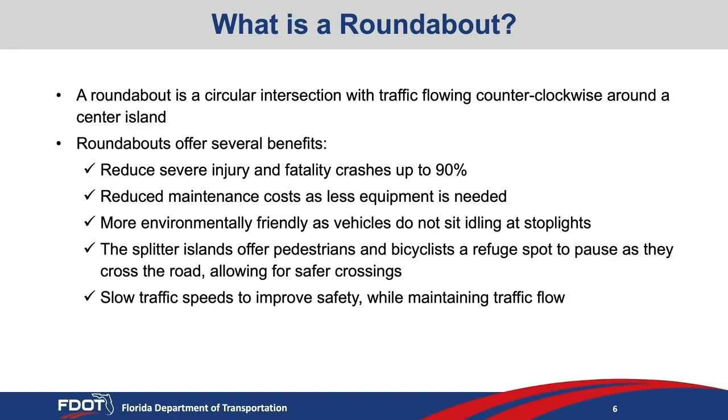A roundabout is a circular intersection with traffic flowing counterclockwise around a center island. Roundabouts offer several benefits, such as reducing severe injury and fatality crashes up to 90%, reducing maintenance costs as less equipment is needed, and are more environmentally friendly as vehicles do not sit idling at stoplights. Splitter islands offer pedestrians and bicyclists a refuge spot to pause as they cross the road, allowing for safer crossings, and slow traffic speed to improve safety while maintaining traffic flow.

The purpose of this project is to replace the existing signalized intersection on US 41 at Gulfstream Avenue with a multi-lane roundabout to improve non-motorized connectivity and access, as well as vehicular traffic flow and operations between the City of Sarasota's downtown Central Business District, the Bayfront area, and Barrier Islands.

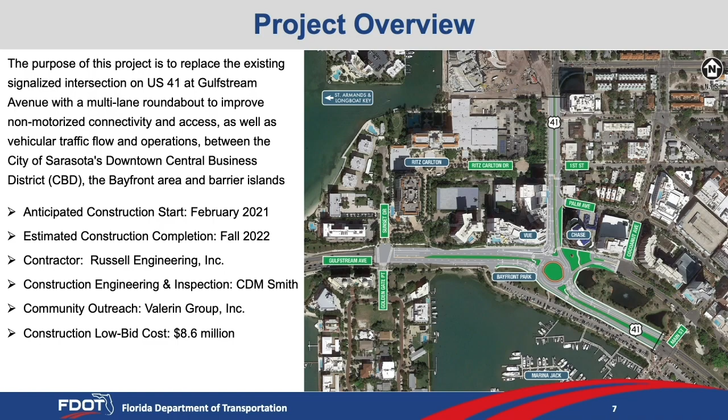The project is scheduled to begin in February 2021 and is anticipated to be completed in late fall 2022. The contractor performing the work will be Russell Engineering. Construction, engineering, and inspection services will be performed by CDM Smith, and community outreach will be led by the Valerin Group. The estimated cost of the project is $8.6 million.

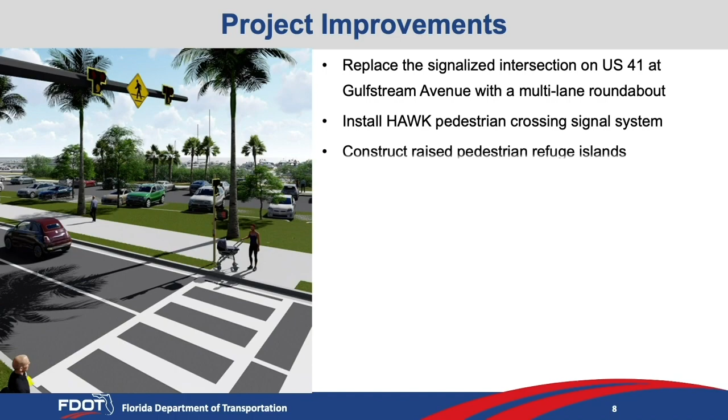In addition to replacing the signalized intersection on US 41 at Gulfstream Avenue with a multi-lane roundabout, this project will include installing a HAWK pedestrian crossing signal system, constructing raised pedestrian refuge islands, replacing underground drainage facilities, utilities, fiber optic communications, irrigation, landscaping, LED street lights, and reconfiguring stormwater retention ponds. New sidewalks and pedestrian walkways will also be constructed.

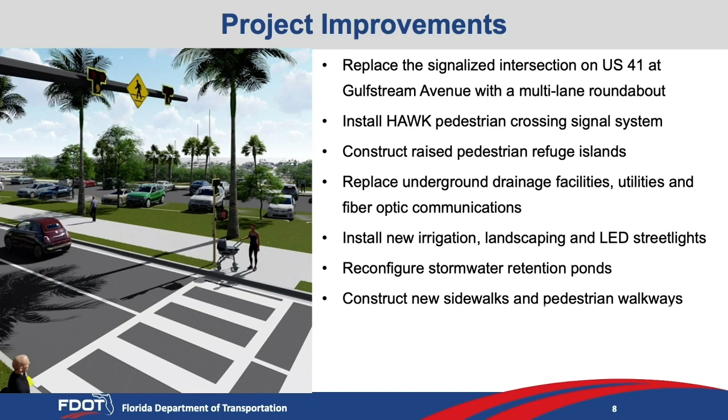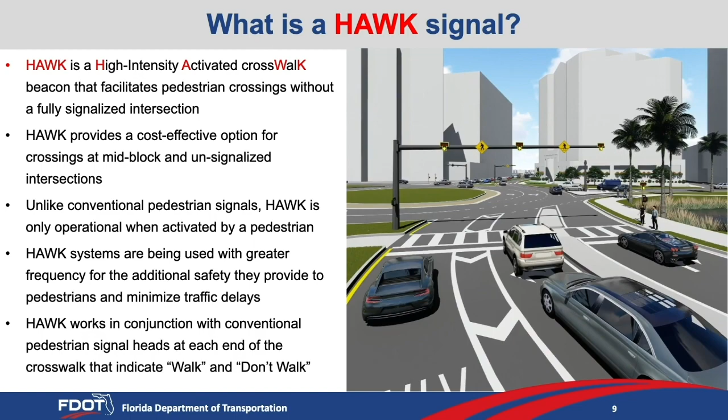Hawk is a high-intensity activated crosswalk beacon that facilitates pedestrian crossings without a fully signalized intersection. Hawk provides a cost-effective option for crossings at mid-block and unsignalized intersections. Unlike conventional pedestrian signals, Hawk is only operational when activated by a pedestrian. Hawk systems are being used with greater frequency for the additional safety they provide to pedestrians and to minimize traffic delays. Hawk works in conjunction with conventional pedestrian signal heads at each end of the crosswalk that indicate walk and don't walk. For a driver, a Hawk signal appears differently than other traffic lights.

When the signal is activated, drivers are cautioned with a yellow flashing signal to prepare them to stop. Drivers must stop at the sustained red light, and only when the pedestrian has cleared the crosswalk and the red signal is flashing can the motorist proceed with caution.

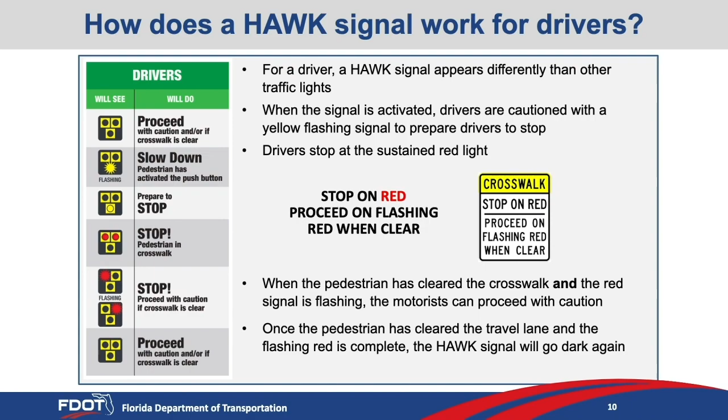Once the pedestrian has cleared the travel lane and the flashing red light is complete, the Hawk will go dark again. The Hawk signal remains unlit until a pedestrian activates it by pressing a push button. After a short delay, the actuated beacon begins to flash yellow to warn motorists that the beacon has been activated.

Pedestrians must wait for the walking person image signal to safely cross. They should not cross while the solid red hand image is displayed, and should only cross when indicated to do so, staying alert to traffic and within the marked crosswalk.

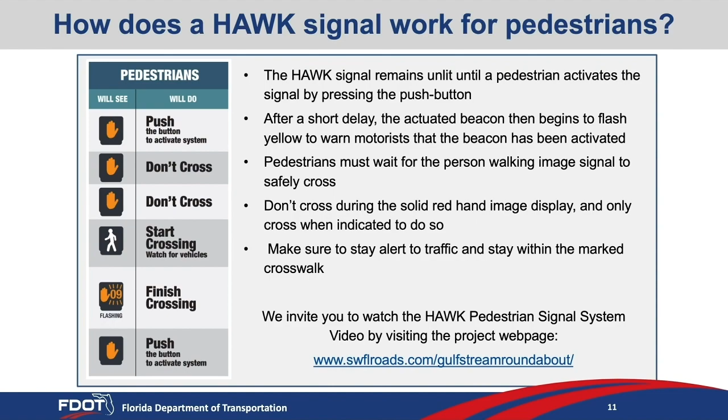At www.swflroads.com/gulfstreamroundabout. During construction of this project, some activities will require the contractor to implement temporary detours and lane closures for the safety of the traveling public, pedestrians, and bicyclists.

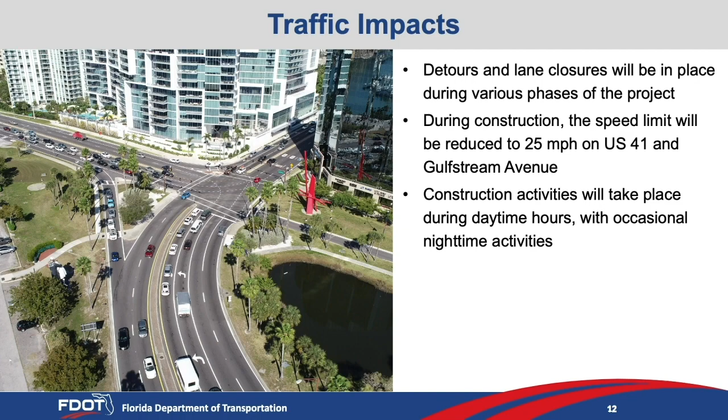Advance notifications of traffic impacts will be provided to the public. In addition, the speed limit in the vicinity of US 41 and Gulfstream Avenue will be reduced to 25 miles per hour during construction. The contractor will perform construction activities during daytime hours, with occasional nighttime activities. Access to businesses will be maintained.

Prior to the start of construction, the City of Sarasota will relocate the Unconditional Surrender statue and Complexus sculpture. The estimated duration of pre-phase is 100 days.

Construction activities during pre-phase include work in the median areas, site clearing, removal of trees, brush, and other materials, construction of temporary pavement for upcoming phases, realignment of traffic signals at Golden Gate Point and Main Street, stormwater retention pond realignment, sewer and water main relocation, partial drainage improvements, and closure of the right turn into the parking area on the north side of Marina Jack.

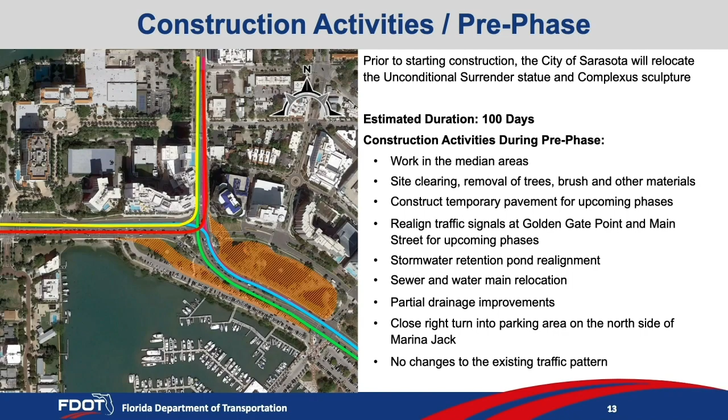No changes to the existing traffic pattern will take place during this phase. During the pre-phase, the following traffic movements will be in place.

Route A: traveling east from Barrier Islands towards US 41 North, eastbound to northbound. Travel east on State Road 789, turn left at the intersection onto US 41 North. No change from current condition during pre-phase.

Route B: traveling east from Barrier Islands towards US 41 South, eastbound to southbound. Travel east on State Road 789, turn right at the intersection onto US 41 South. No change from current condition during pre-phase.

Route D: traveling south on US 41 towards Barrier Islands, southbound to westbound. Travel south on US 41, turn right onto State Road 789 West. No change from current condition during pre-phase.

Route E: traveling south on US 41, southbound through. Travel south on US 41, continue straight through the intersection. No change from current condition during pre-phase.

Route F: traveling north on US 41 towards Barrier Islands, northbound to westbound. Travel north on US 41, turn left onto State Road 789 West. No change from current condition during pre-phase.

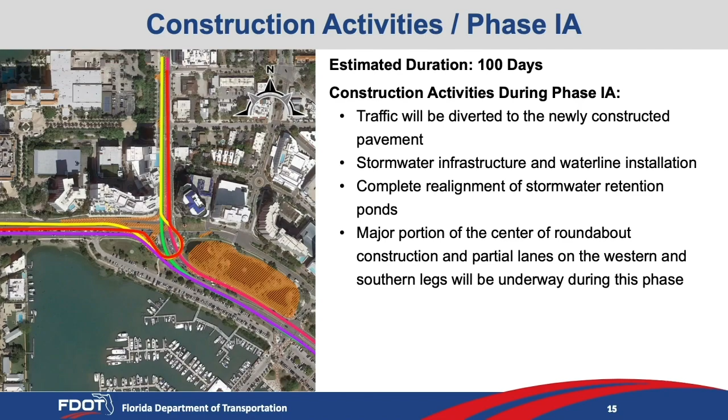In addition, a major portion of the center of roundabout construction and partial lanes on the western and southern legs will be underway during this phase. During Phase 1A, the following traffic movements will be in place.

Route A: traveling east from Barrier Islands towards US 41 North, eastbound to northbound. Travel east on State Road 789, follow new traffic pattern along the curve to turn left at the intersection onto US 41 North.

Route B: traveling east from Barrier Islands towards US 41 South, eastbound to southbound. Travel east on State Road 789, follow new traffic pattern along the curve to turn right at the intersection onto US 41 South.

Route C: traveling east from Barrier Islands towards downtown, eastbound through. Travel east on State Road 789, follow new traffic pattern along the curve to go straight through the intersection.

Route D: traveling south on US 41 towards Barrier Islands, southbound to westbound. Travel south on US 41, follow new traffic pattern, turn right at the intersection onto State Road 789 West.

Route F: traveling north on US 41 towards Barrier Islands, northbound to westbound.

Travel north on US 41, follow new traffic pattern along the curve to go left at the intersection onto State Road 789 west. The estimated duration of Phase 1B is 60 days.

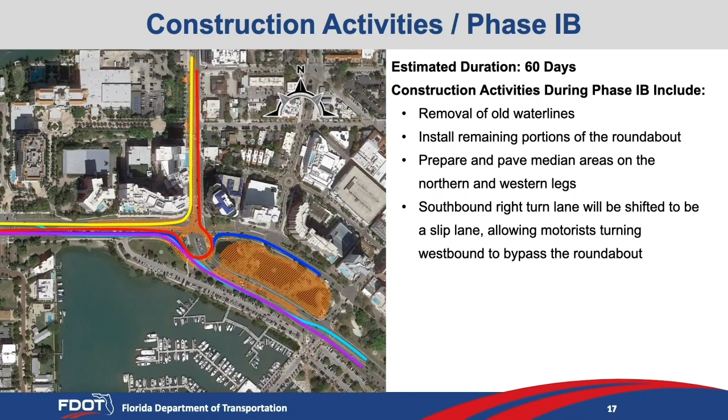Construction activities during Phase 1B include removal of old water lines, installing remaining portions of the roundabout, preparing and paving median areas on the northern and western legs, and shifting the southbound right turn lane into a slip lane, allowing motorists turning westbound to bypass the roundabout.

During Phase 1B, the following traffic movements will be in place. Route A, traveling east from Barrier Islands towards US 41 north, eastbound to northbound. Travel east on State Road 789, follow new traffic pattern along the curve to turn left at the intersection onto US 41 north.

Route B, traveling east from Barrier Islands towards US 41 south, eastbound to southbound. Travel east on State Road 789, follow new traffic pattern along the curve to turn right at the intersection onto US 41 south.

Route C, traveling east from Barrier Islands towards downtown, eastbound through. Travel east on State Road 789, follow new traffic pattern along the curve to go straight through the intersection.

Route D, traveling south on US 41 towards Barrier Islands, southbound to westbound. Travel south on US 41, follow new traffic pattern, turn right at the intersection onto State Road 789 west.

Route F, traveling north on US 41 towards Barrier Islands, northbound to westbound. Travel north on US 41, follow new traffic pattern along the curve to go left at the intersection onto State Road 789 west. The estimated duration of Phase 2A is 90 days.

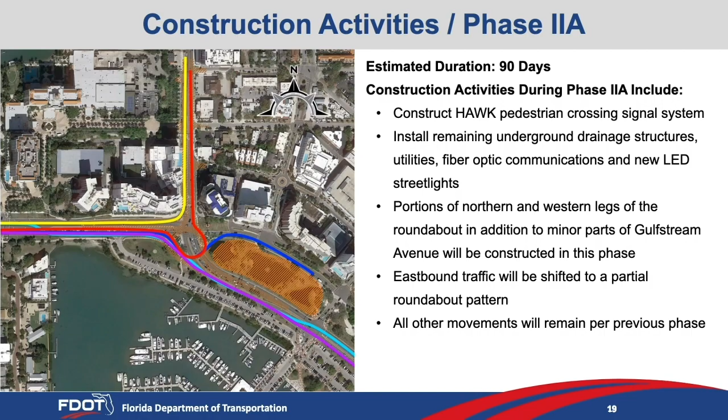Portions of the northern and western legs and minor parts of Gulfstream Avenue will be constructed in this phase, and eastbound traffic will be shifted to a partial roundabout pattern. All other movements will remain per previous phase.

During Phase 2A, the following traffic movements will be in place. Route A. Traveling east from Barrier Islands towards US 41 north, eastbound to northbound. Travel east on State Road 789, follow new traffic pattern along the new partial roundabout to turn left at the intersection onto US 41 north.

Route B. Traveling east from Barrier Islands towards US 41 south, eastbound to southbound. Travel east on State Road 789, follow new traffic pattern along the new partial roundabout to turn right at the intersection onto US 41 south.

Route C. Traveling east from Barrier Islands towards downtown, eastbound through. Travel east on State Road 789, follow new traffic pattern along the new partial roundabout to go straight through the intersection. Route D. Traveling south on US 41 towards Barrier Islands, southbound to westbound.

Travel south on US 41, follow new traffic pattern along the new partial roundabout and turn right at the intersection onto State Road 789 west.

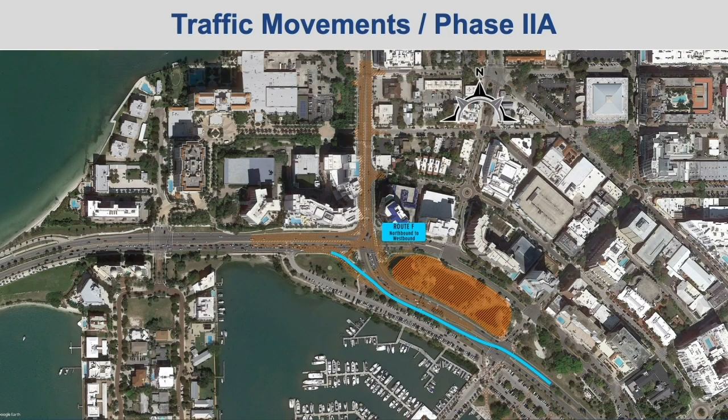Route F. Traveling north on US 41 towards Barrier Islands, northbound to westbound. Travel north on US 41, follow new traffic pattern along the curve to bypass the new partial roundabout towards State Road 789 west. The estimated duration of Phase 2B is 100 days.

Construction activities during Phase 2B include installation of the HAWK pedestrian crossing signal system, restoration of the Bayfront Park entrance and parking lot, pouring outside curbs and sidewalks, milling and resurfacing all tie-in points, final asphalt paving and pavement markings, and placement of final signage.

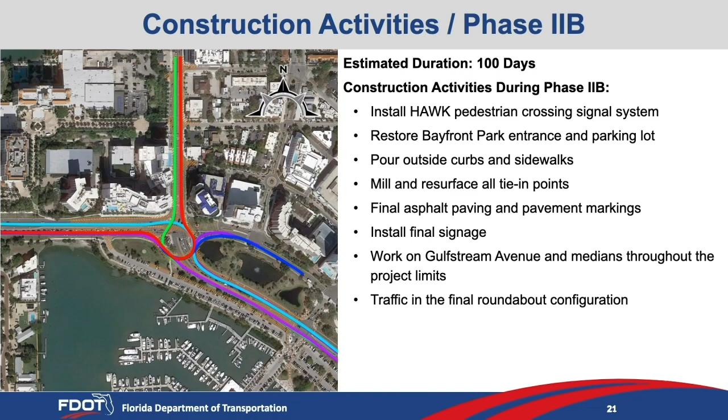During this phase, work will continue on Gulfstream Avenue and medians throughout the project limits. Traffic is expected to be in the final roundabout configuration. During Phase 2B, the following traffic movements will be in place.

Route A. Traveling east from Barrier Islands towards US 41 north, eastbound to northbound. Travel east on State Road 789, follow new roundabout pattern to turn left at the intersection onto US 41 north.

Route B. Traveling east from Barrier Islands towards US 41 south, eastbound to southbound. Travel east on State Road 789, follow new roundabout pattern to turn right at the intersection onto US 41 south.

Route C. Traveling east from Barrier Islands towards downtown, eastbound through. Travel east on State Road 789, follow new roundabout pattern to go straight through the intersection.

Route D. Traveling south on US 41 towards Barrier Islands, southbound to westbound. Travel south on US 41, follow new roundabout pattern to turn right at the intersection onto State Road 789 west.

Route E. Traveling south on US 41, southbound through. Travel south on US 41, follow new roundabout pattern to go straight through the intersection. Route F. Traveling north on US 41 towards Barrier Islands, northbound to westbound.

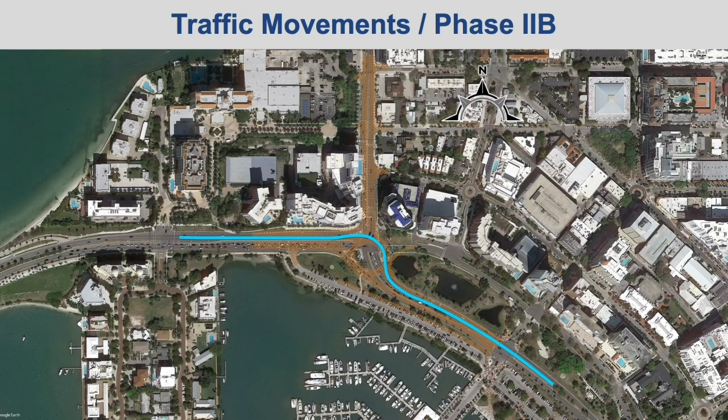Travel north on US 41, follow new roundabout pattern to turn left at the intersection onto State Road 789 west.

Route G. Traveling north on US 41 towards downtown, northbound to eastbound. Travel north on US 41, follow new roundabout pattern to turn right at the intersection, continue towards downtown.

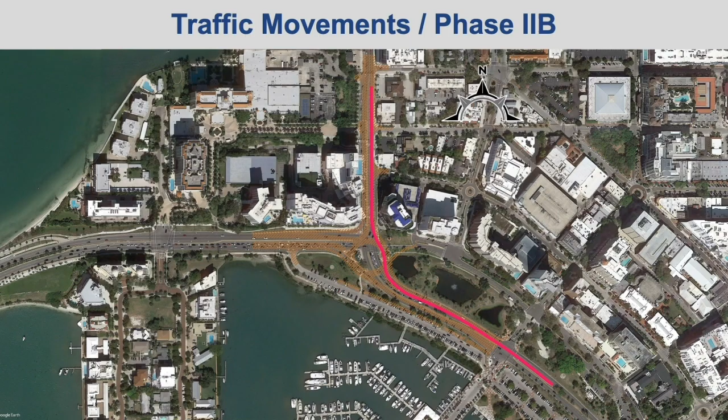Route H. Traveling north on US 41, northbound through. Travel north on US 41, follow new roundabout pattern to go straight through the intersection.

More information about the project can be found on the project webpage link: www.swflroads.com/gulfstreamroundabout.

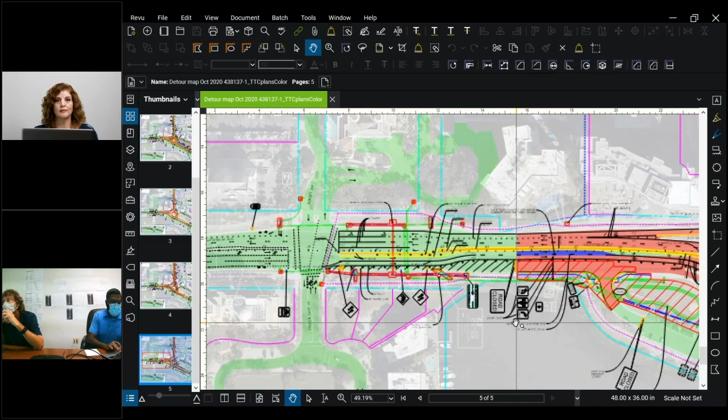Yeah, the design as put forth for construction ultimately was what the community kind of agreed to for that specific location. The outbound movement from the roundabout itself to the east ultimately does not result in a conflict point. So essentially traffic is circulating the roundabout, and if they want to head downtown, they're exiting from that specific location.

If we were to consider, and we did consider, the westbound entry into the roundabout from Gulfstream, that actually adds a conflict point. What happens is that lane of entry traffic would have to cross effectively three lanes in order to gain access into the roundabout if they were to go directly over to the west.

So based on all the analysis that was done, we felt it was prudent to maintain the single exit lane entering into the city, and not move with the option of allowing the entry lane coming from the east, out of the city, into the roundabout, just because of the safety concerns associated with that particular movement.

Okay, our next question. Traffic has been speeding from the barrier islands towards the city on Gulfstream. What traffic calming steps are taken to avoid speeding cars coming off the bridge, both during and after construction?

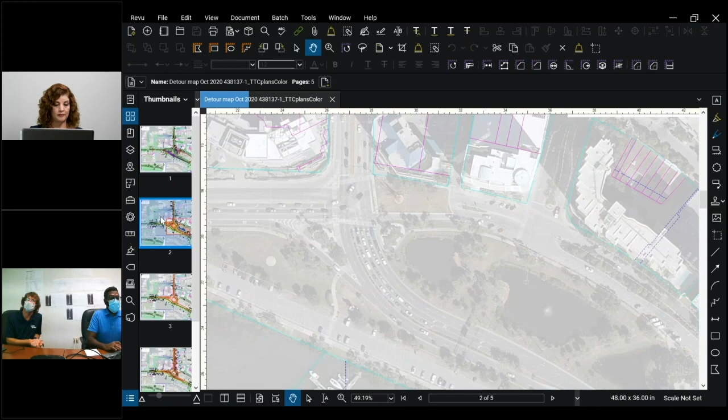The question was what kind of movements are allowed at Golden Gate Point. In general, we have several considerations regarding Golden Gate Point, so let's explain some of the movements in and out.

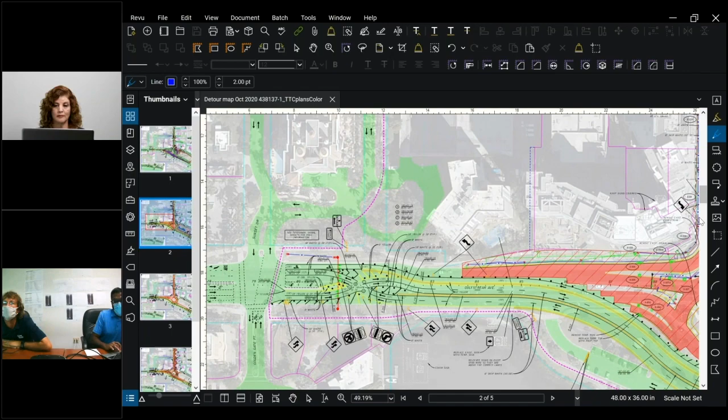In general, for most of the construction, this is the case: if you're coming out of Golden Gate and want to take a right going towards the city, you take a right and follow the signs through the traffic crossover. If you're traveling south on 41 and want to get into Golden Gate Point, you go south on 41 and take a right at the intersection, or follow the traffic route depending on the phase you're in.

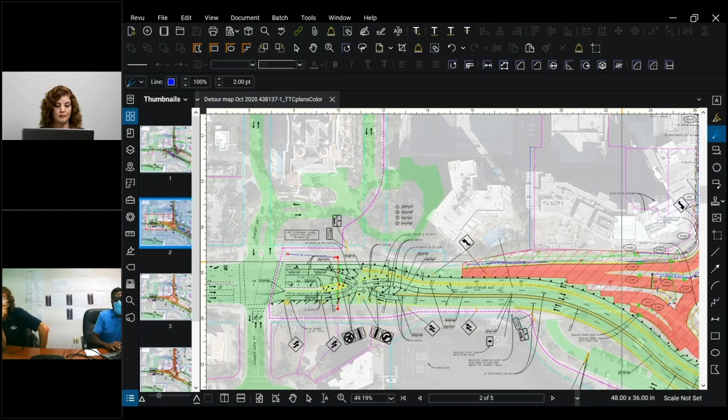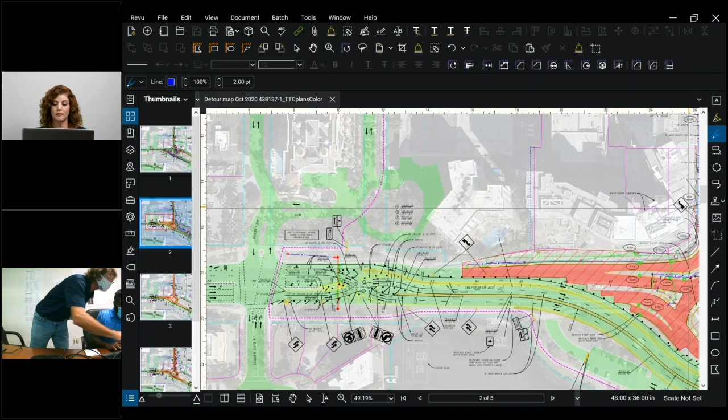But traveling on Gulfstream going west, you cannot make a left turn into Golden Gate Point at the intersection. You have to go through to the next signalized intersection, which will be the designated route. You go straight through, make a U-turn, come back traveling east, and then take a right into Golden Gate Point. Let me see if I can draw something here on the picture.

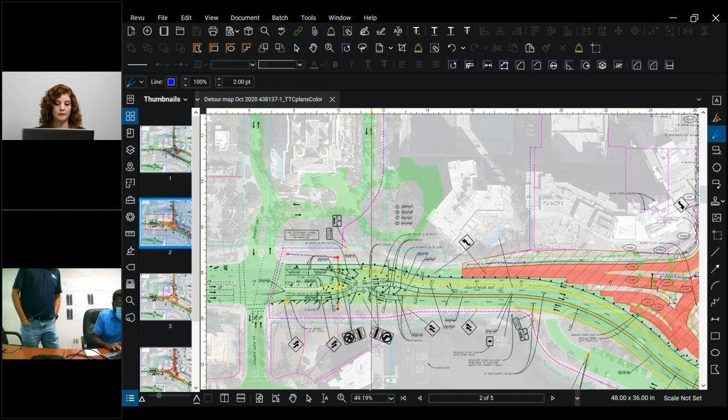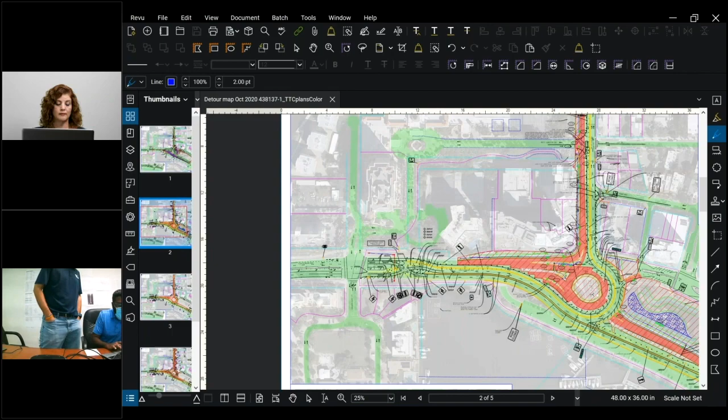That only applies to people coming south on 41. If you're coming from the south going northbound on 41, you would be able to make a left turn into Golden Gate. Is that right, Gary? Correct, yeah. So if you're coming south on 41, I'm just going to draw it in general.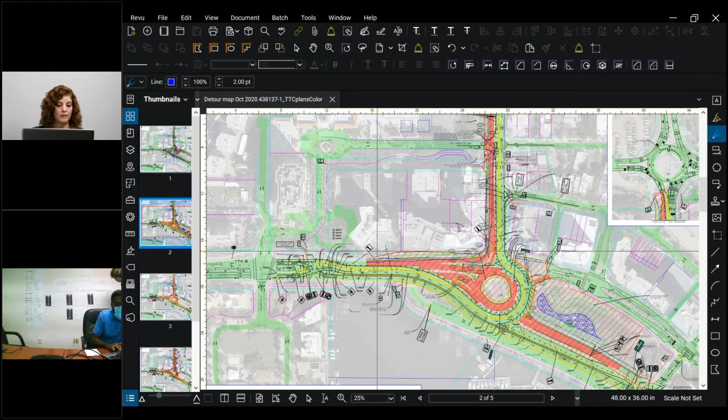So it'll be... oh, that's small. In the meantime, while Pinky's drawing the graphic.

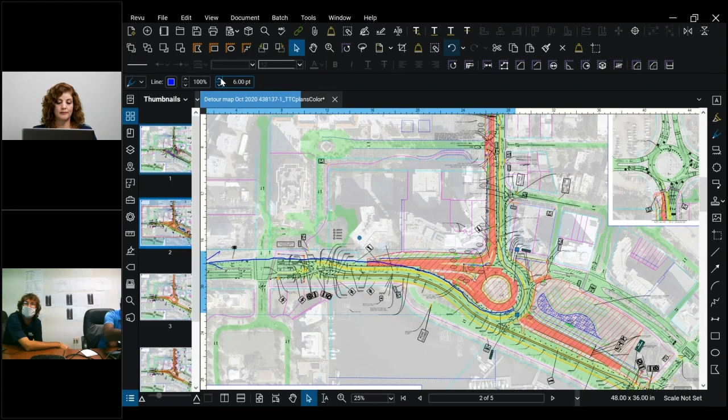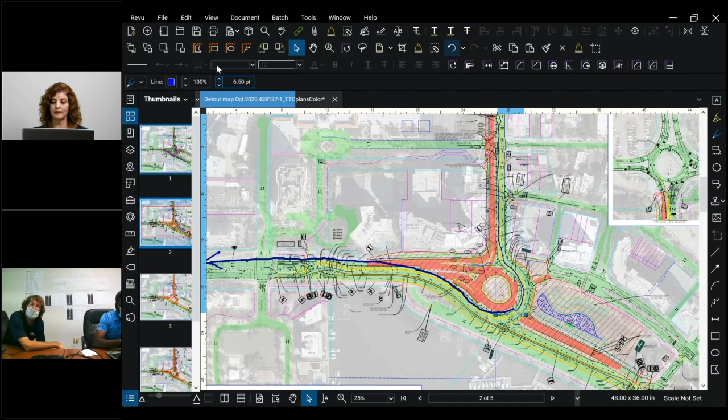What Pinky showed with the blue hand-drawn line is this: if you're coming south on 41, you'll go around the construction zone within your lanes, then go out towards the bridge, Bird Key, do a U-turn, and come back to get to Golden Gate. If you're coming from the south and going northbound, you will come right up through and be on the left side of the road and be able to make a left turn into Golden Gate.

If you're coming from the south, you'll follow this route. You'll follow this route.

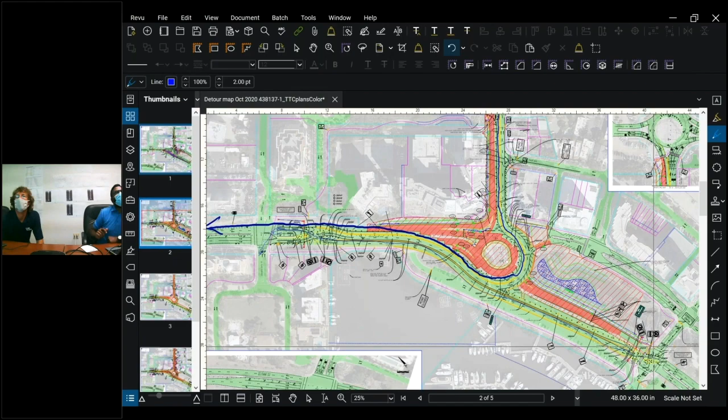So, is it yellow? Oh yeah, I see it. He tried to show that again: coming from the south, you'll come up through the traffic lanes and be able to make a left turn into Golden Gate Point.